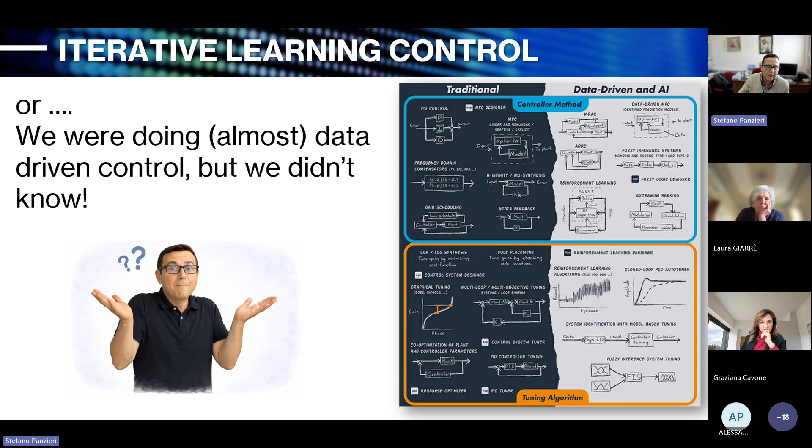Maybe one thing I have to say is that maybe we were doing almost data-driven control, but we didn't know it, because with iterative learning control, you work with data. You build your control starting from acquisition from the field, from the system. But if you ask me, is iterative learning control really a data-driven scheme, I have to say sometimes yes, sometimes no, because in many cases, as is written here, the model is required. While we know that in data-driven schemes, you try to avoid building your model, and you just want to build your control starting from raw data coming from the system.

But we have to see something later. Okay, for people that absolutely don't know what iterative learning control is, you have to imagine that you get a system. Maybe you also already have a controller that more or less is working, and you imagine that you can repeat your experiment, your trajectory, several times, and that each time you repeat it, you add a contribution to your controller that is calculated starting from data collected from previous iterations. So the two principles are that the system is reinitialized at each iteration and that the control is updated. So you need a memory, of course.

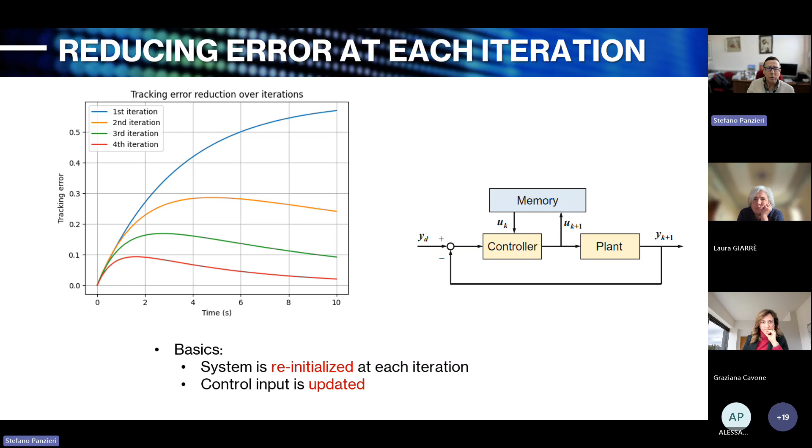This is a very easy scheme, but the problem is when such an approach can converge, and which is the right law to update your memory and to update your controller.

Well, I think we must go back now to the very beginning. And the very beginning is 1984, 40 years ago. In 1984, there was a Japanese professor, Professor Suguru Arimoto, who started showing us, in a small article, 'Bettering Operation of Robots by Learning,' that very simple law.

The one you see now, in which the next input, or the next additive term, is calculated by simply considering the previous iteration and adding a term that depends only on the derivative of the error at the previous iteration. It is sufficient to get zero error after a certain time. This is called a D-type algorithm, the derivative type algorithm.

It is not strange that we consider the derivative of the error in this feedback, because you have to remember that in iterative learning control, you reinitialize the system always in the same position. So the error at t equal to 0 is always 0. And of course, intuitively, if the derivative of the error is always 0, the error will be 0. This is very intuitive, but you have to demonstrate that everything is working.

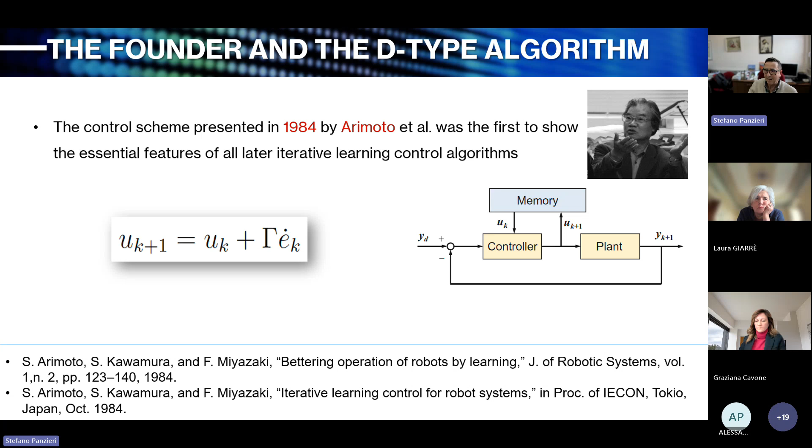But why must the relative degree be 1? Because don't forget that you are updating the input at time t with the error at time t. So you suppose that in some way the input at time t has an effect on the output at time t. So you must have a relative degree equal to 1, otherwise you cannot do it.

Then the demonstration is very easy, because you just have to calculate the output with the well-known relation: this is the free evolution and this is the forced response. Then you have to calculate the evolution of the error. So E dot, the derivative of the error at iteration k plus 1, is given by the difference between the derivative of the desired output minus the derivative of the output at iteration k plus 1. Then you simply write all the equations that give y dot at k plus 1.

You have a lot of calculation here to do, but they are only derivatives. And at the very end, you have an expression like that. Now, you can try to make the norm, to take the norm of this expression.

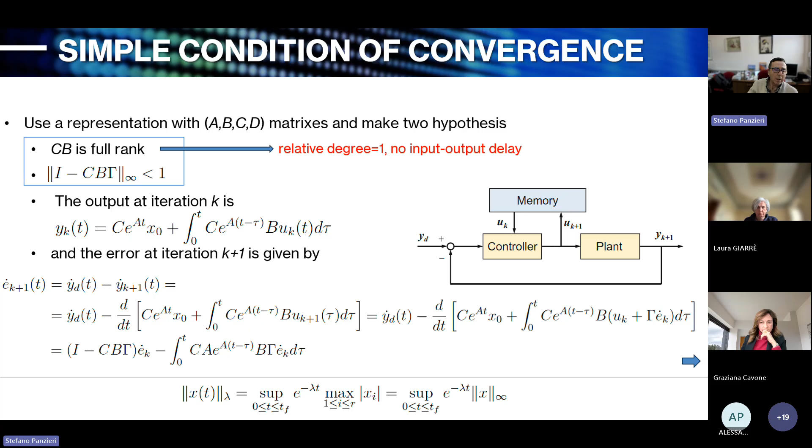You can use a lambda norm and also an infinity norm. And it is almost easy to understand that considering a sufficiently large lambda, it is possible to bound all the terms in the previous expression. You have to work a little bit, but not too much.

And so you can reach an equation in which there is on the left the lambda norm of E dot k plus 1, and on the right the lambda norm of E dot k multiplied by a parameter rho that can be made less than 1. So this is a contraction map, of course, and this implies the convergence of E dot. If E dot converges, of course, also the output will converge.

Now, this is really the very first algorithm that was presented, but it is an important one because all the subsequent algorithms that we will find are more or less based on such demonstration. Which is the main problem of this approach?

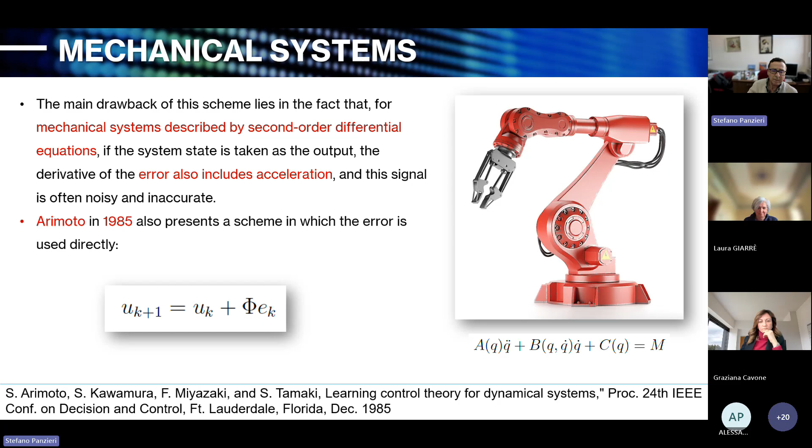Well, unfortunately, the convergence using the error and not the derivative of the error is not easy. But they demonstrated that if the system is strictly positive, linear, time invariant, that is, the passivity conditions holds, and this may be true, of course, in many cases, but not always. If you have this passivity condition satisfied, okay, you may have a convergence to zero.

Now, this is of course good. And later, Arimoto, with the other people that we saw before, proposed also more general laws. This is something that can be considered a PID controller in the iterative scheme, in which you have a feedback from the error, from the derivative of the error, and also from the integral of the error. Of course, according to the terms that you put inside your update, you have different conditions that you have to satisfy to have convergence.

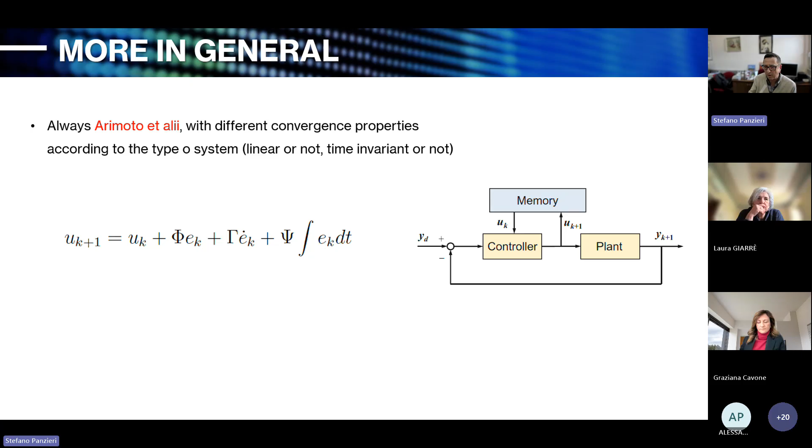After that, we can find other approaches, of course. For example, Togai and Yamano, always in 1985, 84 and 85 were very prolific years for this control scheme. They proposed something starting from the hypothesis that the system is expressed as a discrete system, so that can be also time variant. You see that the matrices A, B are dependent on the iteration, sorry, on the sampling time.

As an update, they have to consider something a little bit different. They can use, of course, the error. The input U is updated with the error that you have just obtained, and then another term that is built considering a little bit of lead.

Look here, the term V at iteration i plus 1 is equal to the term V at iteration I plus the error at iteration I, and of course this is okay, but at time or at step k plus 1. So we are a little bit looking into the future. Yes, but we are looking into the future of the previous iteration. So you can do that.

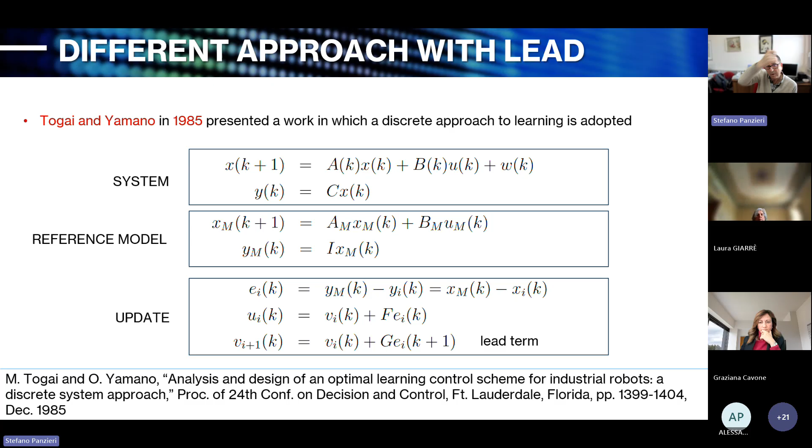Thanks to this approach, they could demonstrate easily that the evolution of the error, expressed as a discrete transfer function, can go to zero. This is a contraction map if the closed loop function has all the poles inside the unit circle, which is possible by choosing the matrix F appropriately, and then choosing also a matrix G in the right way, so that all the eigenvalues of this matrix are inside the unit circle, making this a contraction mapping.

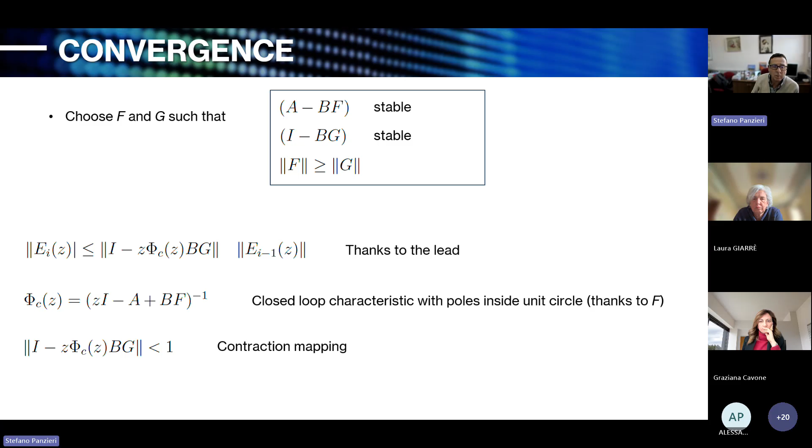But this may happen only because you are considering one step in advance the error. This is a technique that will be used also later.

Just to be complete, I have to tell you that sometimes you may try not to consider all the memory that you have from the previous iteration, but just a part of it, using a multiplicative term called the forgetting factor — forgetting factor because you forget a part of the previous input.

Is it working? Well, yes and no. Yes, because the convergence is easier. Yes, because maybe you have the opportunity to forget disturbances that are not periodic, I mean non-persistent, so disturbances that you could not reject with an iterative scheme. But the convergence is slower, and then you cannot guarantee an exact tracking, because you never reach exactly the input you need for a desired trajectory. But, of course, you may go very, very near.

Then there are a lot of people that try to reason not in time or with samples, but directly with frequency, using transfer functions. For example, in this paper — well, I think this is the right paper, but I'm sorry, I cannot be sure, because I found many references to this paper. I know more or less what is written inside, but I have lost the original paper. So I must put a question mark in this citation. I'm not really sure, but it should be that.

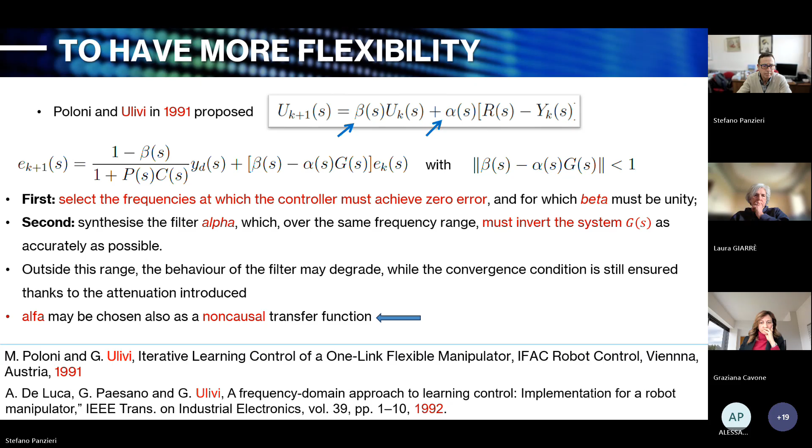It is possible, of course. Why is it possible? Because although you have a transfer function that is not causal, you have to implement it in time — but you can implement it using the samples of the previous iteration that you have, because you have all the samples of the previous iteration. So you are allowed to use non-causal gains as well. In this way you do the two things: you choose the frequencies in which you want the error near zero or zero, and you may have a non-causal inversion. This is a very, very nice result, of course.

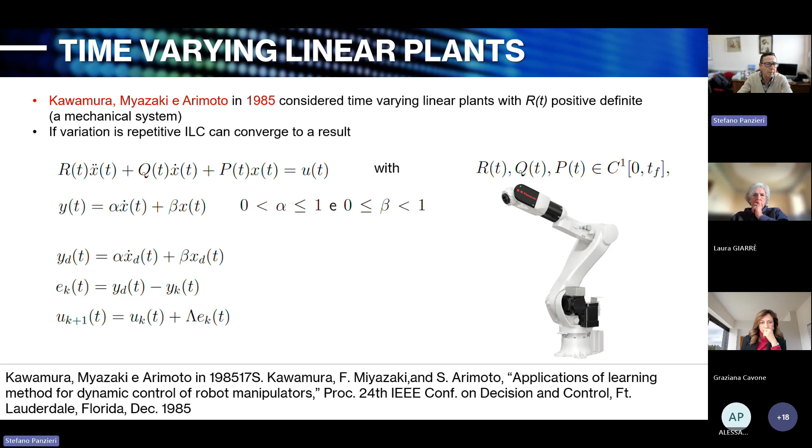Now we start with things that are a little bit more complicated, but not so much. In 1985, Kawamura, Miyazaki, and Arimoto demonstrated that even if you have a plant that is time varying, what's important is that it repeats in the same way all the time, so at each iteration it varies always in the same way. If you have such a plant, you may set up a learning algorithm, in this case using the error directly, not the derivative, and you may very easily have convergence of this algorithm.

Another approach presented by Moore with time-varying plants is quite different, because in this case you have an update that depends on the output of the system, but you directly multiply the output by the inverse of the plant. The inverse of the plant is obtained with an optimization problem, so you calculate the minimum at each iteration of this expression with respect to n. When you have the minimum, n exactly inverts the plant, and then you may apply it to update the input. This is a real data-driven scheme in which you don't have a model, you estimate everything at every iteration.

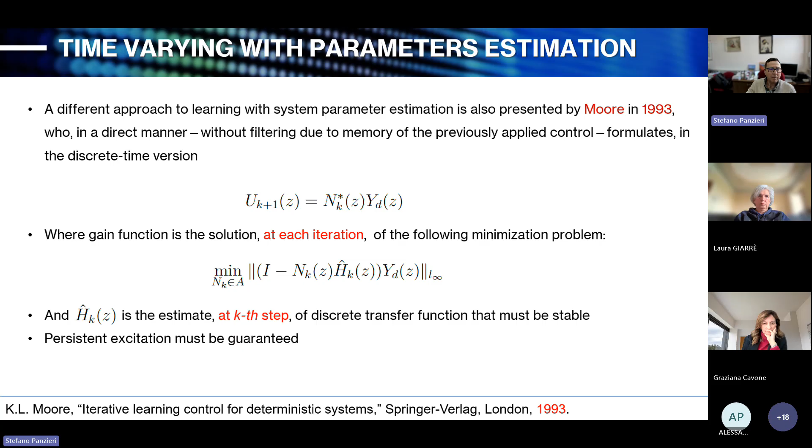Of course, there are other kinds of formulations. For example, you can put in one vector all the samples of the input, and in another all the samples of the output, and then write the system with an expression containing a matrix G that just maps the inputs to the outputs. This is a very compact representation in the sense that you write it easily, but your matrix G is very large, because it contains all the numbers of your system inside. I think that in the '90s this was considered not easy to use, but actually this is exactly what we do in data-driven control now, so this is no longer a problem.

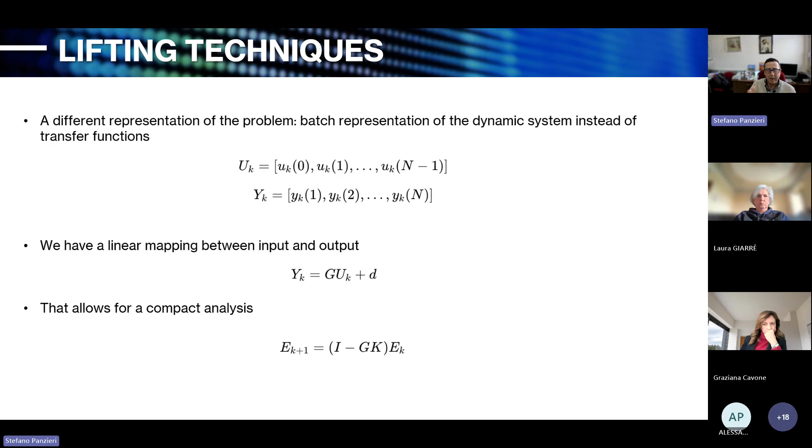There are many papers based on this representation that present results saying more or less the same things we have seen.

What about nonlinear systems? When we go to nonlinear systems, there are several techniques that have been presented over the years, using for example Lipschitz analysis, or partial feedback linearization, or decomposing your system into several different controllers using backstepping techniques, or sliding mode to constrain your system to a particular manifold or trajectory, or singular perturbation analysis trying to linearize your system as much as possible, or any other kind of stabilizing controller, just to transform your nonlinear system into something with better properties that can fulfill the conditions found and published in several papers.

But also looking at the paper of Arimoto in 1984, we find an approach to nonlinear systems. The nonlinearity is limited to the function f: we suppose the input is linearly related to the derivative of the state, and the output is linearly dependent on the state, so the nonlinearity is limited to just this part of the system. Simply supposing that f is Lipschitzian, with hypotheses of continuous differentiability on the input and output, and considering a condition similar to the one we saw before, they were able to demonstrate again the convergence of the derivative of the error to zero. This demonstration is quite simple.

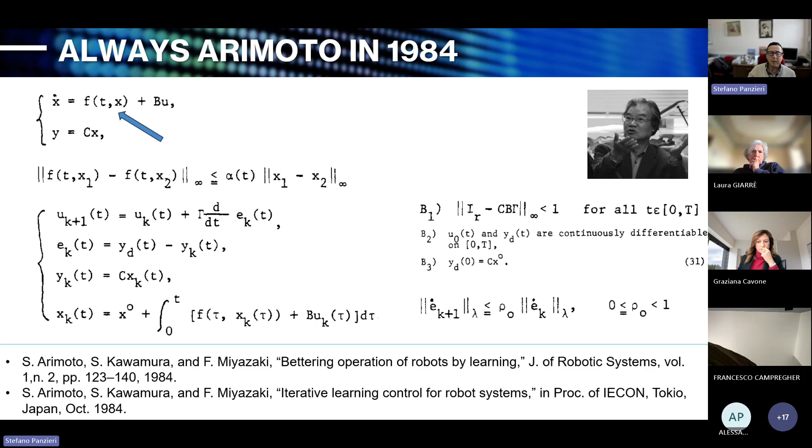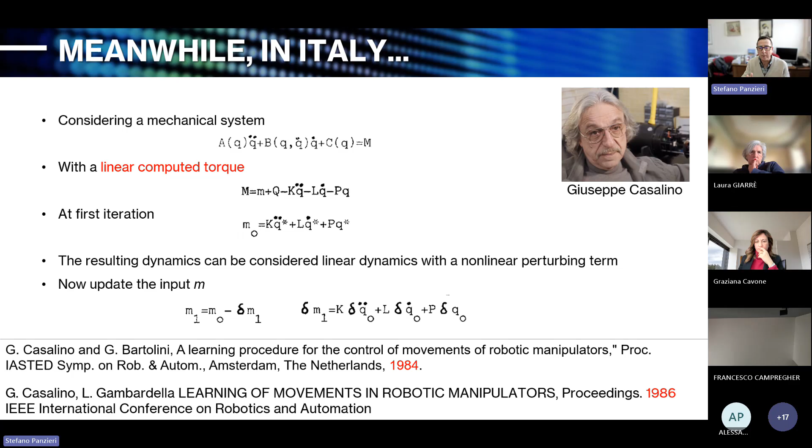At this point we have to remember the work done in Italy by Giuseppe Casalino, who in 1984, the same year as Arimoto, proposed a scheme related to a robotic application involving a linear computed torque. That means you imagine having an input made mainly of a computed torque, something related to the trajectory you want to implement, but there is also a part of the control that you can modify at each iteration. So in the end, what you're doing is just updating your computed torque, adding a term that compensates for the difference between what you estimated from the beginning and what you really had to give to your robot. The condition for convergence of this scheme is not difficult to satisfy for a robot, and so it was a successful scheme that has been applied many times.

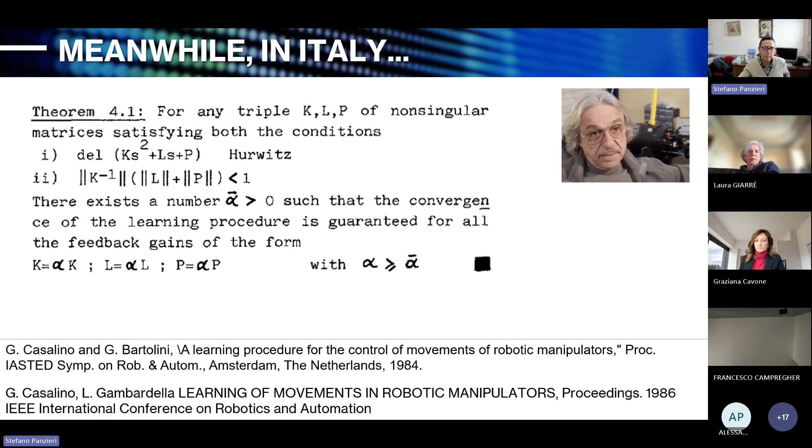Of course, I'm speaking of a work of 1984, and so in the last 40 years many other things have been done, many other approaches that are working on feedback linearization. Backstepping is also another possibility.

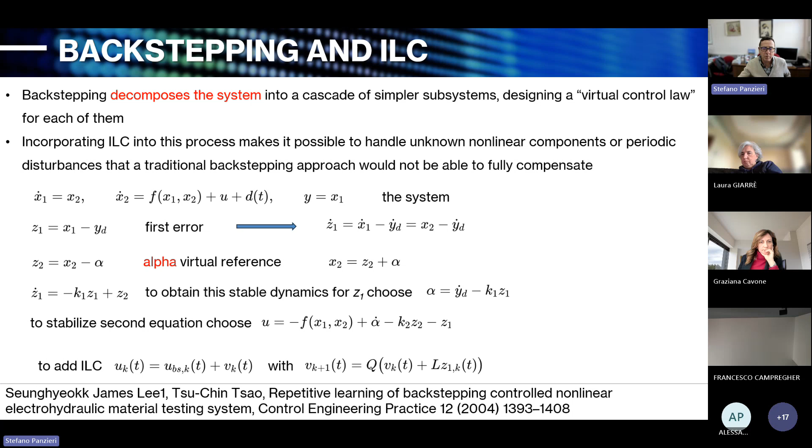You can use, for example, a nonlinear system for which you have an output related only to one state variable. You close one loop using a virtual reference, then you close another loop, and then you may define a learning scheme that can be used to stabilize the external loop, propagating the effects inside towards all the other controllers that are part of your decomposition. More easy to do than to explain.

I found also this very interesting paper, really recent, from 2023, due to Pierallini, Angelini, Mengacci, Palleschi, Bicchi, and Garabini, in which they consider this very interesting application: an underactuated system with elastic joints. So a real difficult plant.

The model is here, it's a nonlinear model, of course, and then elasticity adds many difficulties. They also consider having non-repetitive disturbances, and the problem of non-repetitive bounded deviation of the initial position. So they imagine that the initial position is not exactly always the same, but maybe near the same position. They consider a law in which they update the input with a time and iteration dependent gain.

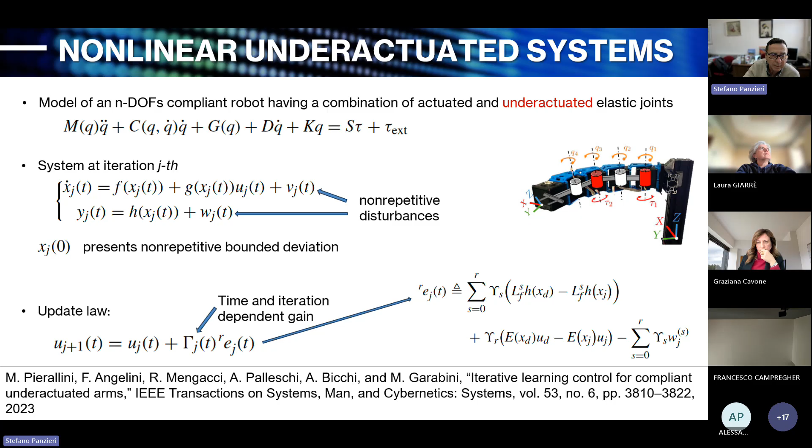So they try to do something really not easy, but in spite of such difficulties, they are able to calculate the evolution of the error iteration by iteration. The expression is here. They have to consider the Lie derivatives of the function h of the output, and work also with conditions related to Lipschitzian constants. They are able to demonstrate that the error remains bounded.

I think that it's enough. It's the most you can do, because you are supposing non-repetitive disturbances. So more than this is really impossible.

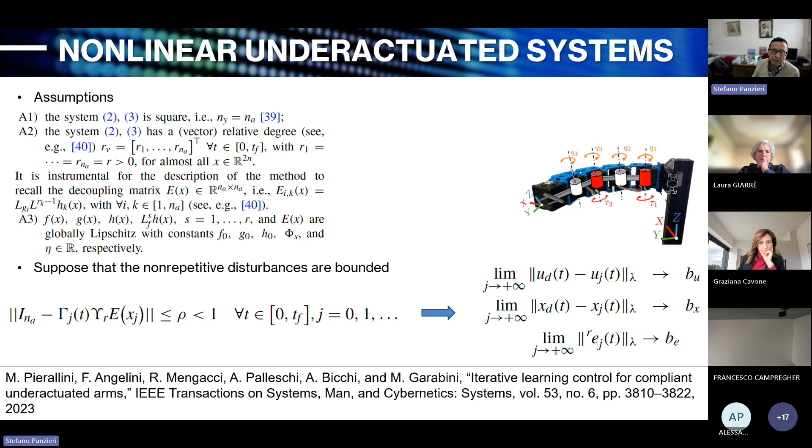Another interesting paper that I found, I couldn't write the year but it's recent, is the control of cranes. Cranes are difficult to control because you have a mass that is suspended behind another one that can move, a trolley that can move along a bridge, and typically these are non-minimum phase systems, and in this case the authors propose to use sliding mode.

So they firstly define a sliding surface, or more than two sliding surfaces, and they close the loop with this sliding mode. After closing the loop, the system is reduced to a behavior that is really simpler than the one you have without the sliding mode, because without it you have a lot of nonlinear equations, very difficult to use.

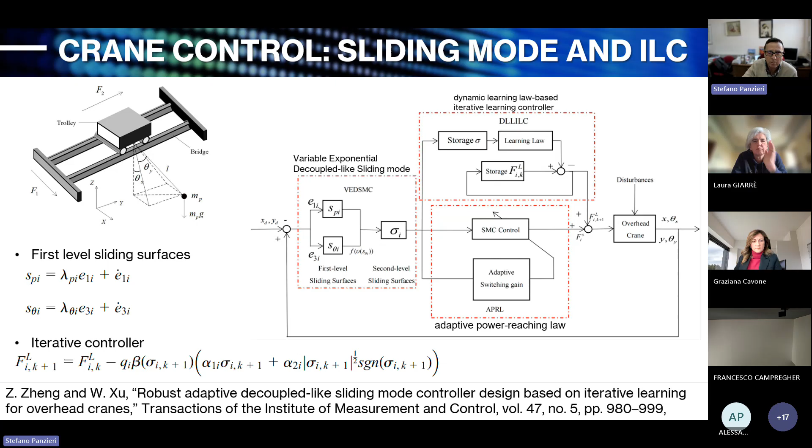Then you try to update a contribution that iteration after iteration is related to the output of the system, and they succeeded. In this paper, they clearly show how this approach can be feasible, and if I remember, there are also some experiments just to show that it is really feasible. Which are other problems related to iterative learning control?

At this point, there are a lot of problems, also new problems. One is the problem that I cited before, for example, for non-minimum phase systems, for which you have robots with elastic elements. Non-minimum phase systems have the problem that when you invert the plant, the inversion is not stable. This means that if you want to control them with a standard feedback controller, the only thing you obtain is instability.

We have already seen that this kind of problem in iterative learning control can be overcome using non-causal inversion, that means, for example, using a transfer function filter that is not causal, or in schemes where you don't have a transfer function but you have the samples, considering advanced output data, or even it is possible to consider a shift of the reference. So advancing the reference is more or less the same as shifting the output data.

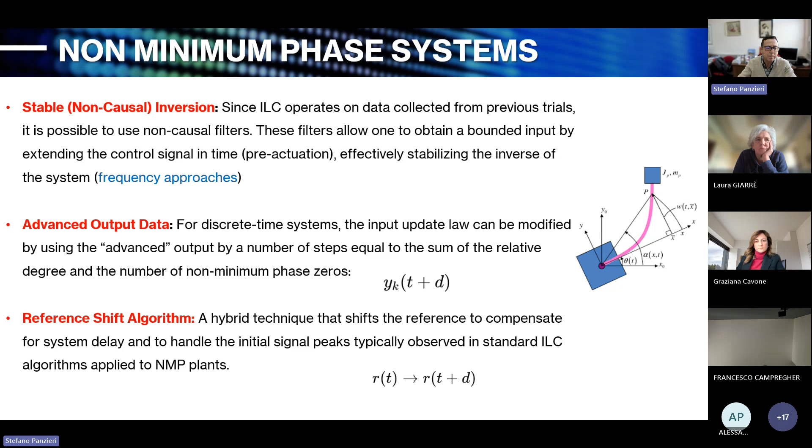This is a possible solution, but some problems remain in any case, because the convergence sometimes is really problematic. Another problem that is incredibly difficult to solve is the problem that you have when your trial is not ending.

For example, you are trying to learn something a little bit difficult, and your system cannot complete the trial because it is collapsing before. For example, you would like to learn how to play with a ball, and at the very beginning the ball falls down, so you are not able to complete a trial. So what can you learn?

There is this paper of Dong Shen and Xuefang Li called Iterative Learning Control for Systems with Iteration Varying Trial Lengths, 2019, in which they analyze the problems you may have with trials that are not ending. They propose to consider a modified tracking error, simply set to 0 for the samples that you don't have. Then, using an iteration average operator, they propose a modified iterative learning control scheme, and they demonstrate that this algorithm can achieve convergence even if the trials at the beginning are not completed.

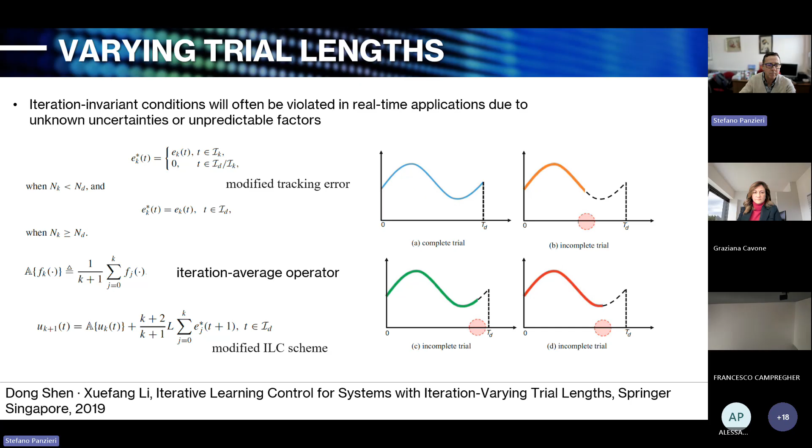So there are a lot of people working on this topic, and I think there are a lot of possible applications. Another big problem is the initial state shift. I mean, the state at the very beginning is not always the same, because you are not able to put the system exactly in the same state at the beginning of your trial.

This means you have a kind of persistent term that, if it is always the same, you can try to compensate iteratively. But if it is changing iteration by iteration, you will never be able to compensate it. What you can do, for example, is try not to consider the error at the very beginning, multiplying it by a function that is initially almost 0 and later becomes equal to 1. So you try not to consider the errors at the beginning, hoping that the transitory connected to the initial condition will vanish, so it is not so important.

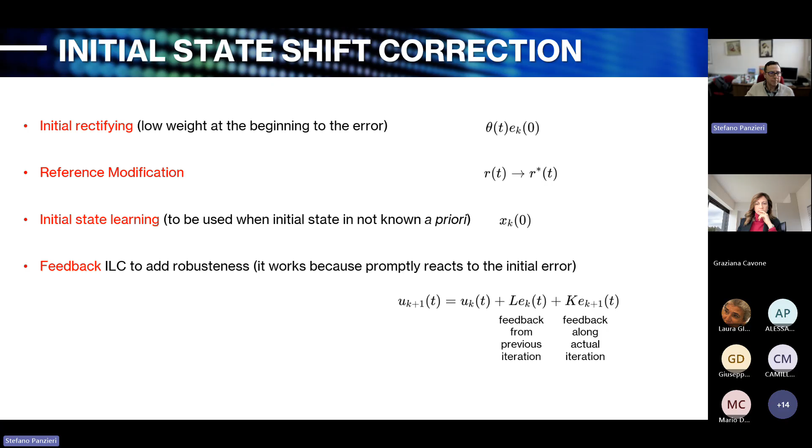Another big problem is related to data that are not always available. For many reasons — for example, you are using an incremental encoder that gives data only at some sample times, which are not enough for the application you would like to implement. The sampling time of the encoder could be slower than the sampling time of your algorithm or any other kind of sensor, so you don't have all the samples you need. Or you are on a network and you lose some packets, or packets are coming with a delay.

In any case, this is a problem called intermittent data, and it is possible to work with intermittent data in some conditions. There is an interesting paper from 2022 by Nard Strijbosch and Tom Oomen, published in Automatica: Iterative Learning Control for Intermittently Sampled Data, Monotonic Convergence Design and Applications. It's an interesting paper you must read if you want to know more about this.

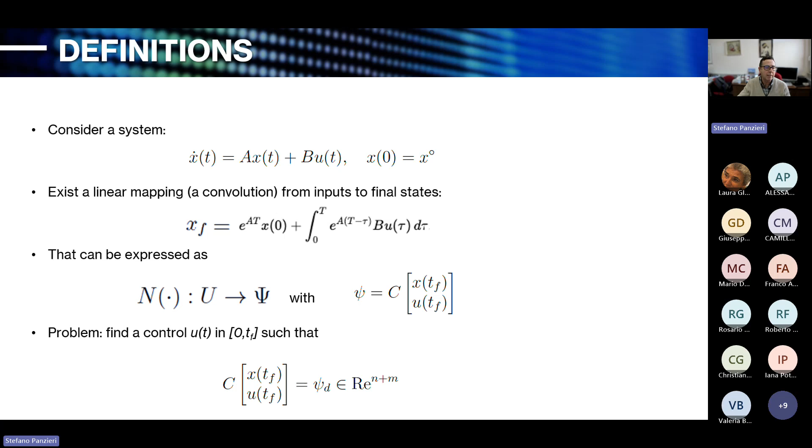It's not difficult to set up such algorithms. Imagine you have a linear system. With a linear system you have a linear mapping between the control input and the final value of your state. It is a linear mapping, and of course a convolution, so it's not easy to manage, but it's still linear. This mapping can be used to represent the final state as a function of your input.

So this is the initial state, this is the contribution of the input, and this is the final state. If you set a control law where you update your input by multiplying the error between the desired final state and the actual final state by an operator F, with a simple substitution you obtain an iteration for the error described by this equation. If F is able to exactly invert the operator N, you obtain zero from this equation, and you have convergence in just one step.

Otherwise, it's possible that you don't have exact inversion, so considering the norm of such operators, if the norm of this expression is less than 1, you may still have convergence of the error to 0.

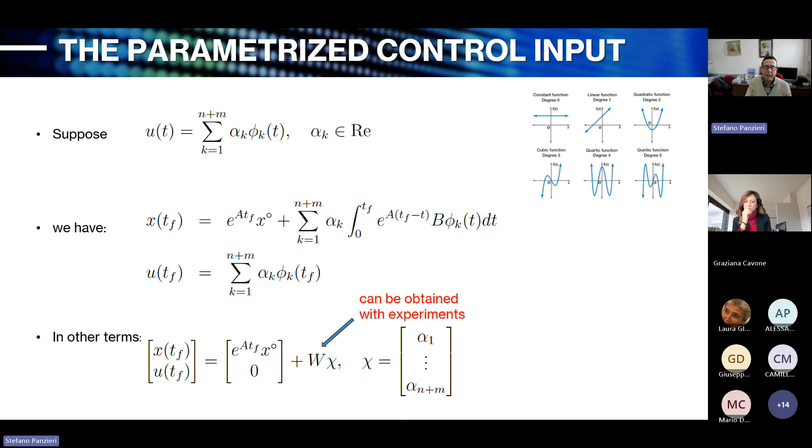This means you may define your input as a linear combination of basis functions. Basis functions can be, for example, polynomials, but you're not limited to polynomials. So you have a linear combination of basis functions with parameter alpha. When you write the relation between the parameters alpha and the final state, you obtain only a matrix - the operator is a mapping represented only by a matrix. You multiply this mapping by the parameters and obtain the final state. At this point, you can easily use this mapping to update the vector of parameters.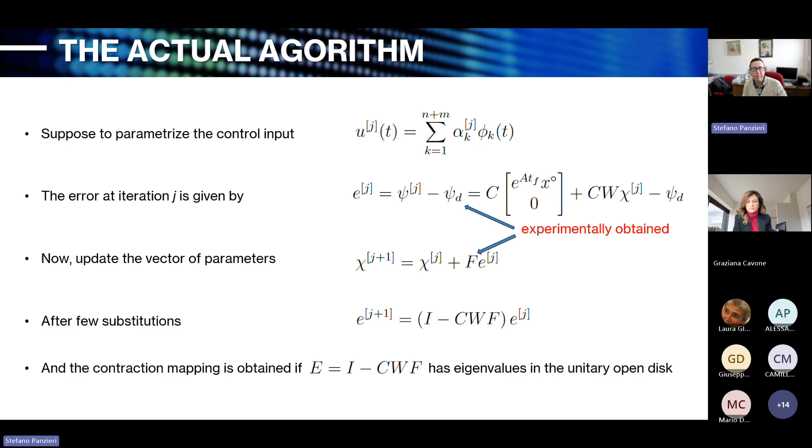And the relation that you have at the very end should be this one... yes, it's this one, and it's very easy to demonstrate the convergence of this algorithm. The good news is that any kind of problem related to non-minimum phase systems has no importance for this algorithm, because you're not considering the transfer functions or the output along the whole time, but just the final state. So this works perfectly also with non-minimum phase systems.

This is, for example, an application we did in '97 - Lucibello, Panzieri, Ulivi, 1997 - with flexible robot arms. You go from this position to this other position. This is the value of the first angle, this is the value of the second angle, and this is the deflection, I think.

No, these are the speeds. The deflection is here, of course. There is a small deflection at the beginning, then the robot is deflected in the other sense, then it stops. So it's very easy to implement if you don't care what happens between the initial state and the final state - you don't control it. But really, you cannot control it this way.

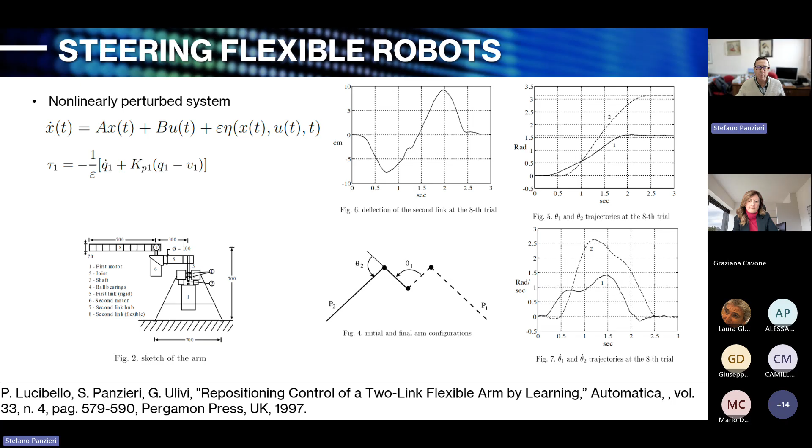No, you can control it, because if you want, you can put several intermediate steps and specify that you want particular outputs at those steps. Of course, you have to increase the dimension, the number of your parameters, but you always have a controller with low dimension. That is very good.

The same reasoning can be applied also, for example, to non-holonomic robots. This is a paper in which we apply this algorithm to a car-like robot.

It is possible for car-like systems to transform the model into a chained form. The chained form has the property that the first input is related to the first variable: Z1 dot equals V1. The second input is related to the second variable in this way, and the equations of the other variables depend only on the first input.

If the first input is, for example, piecewise constant, the second part of your system is a linear system as far as the input V1 is constant. So if you use a basis function made as a constant for V1, you have a sequence of linear systems. It is time varying, but constant for many intervals, and so you can set up this learning algorithm very easily.

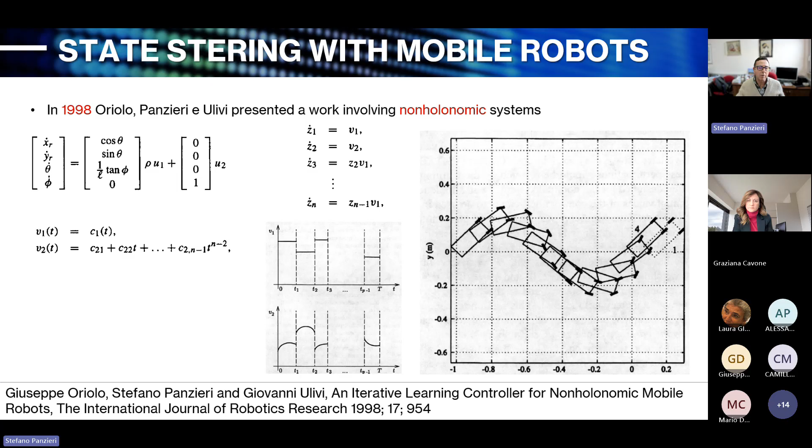I've got three more slides, so I promise I'll finish very soon.

One is this: iterative feedback tuning. This is a very interesting iterative learning scheme in which you consider that your system is controlled by two transfer functions depending on a parameter rho, and you update this parameter at each iteration, optimizing an objective function that is the expected value of the error. So you make an optimization every iteration, and after minimizing this objective function, you have the possibility to update the value of your parameters using a quasi-Newton method. The problem is to compute a gradient, but the gradient is not easy to compute.

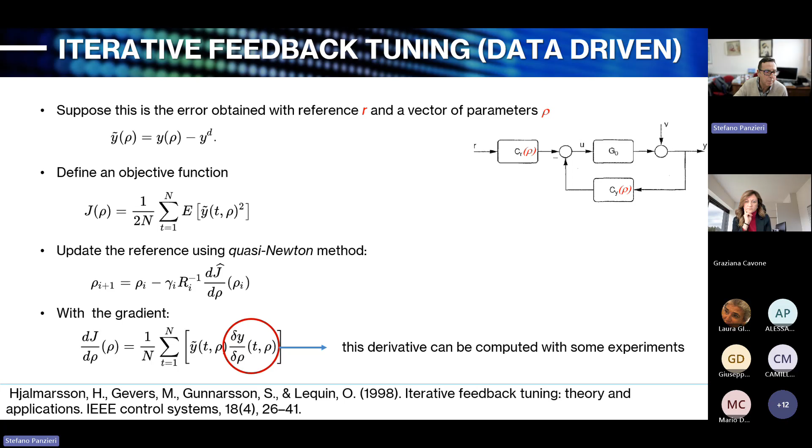Calculating this gradient is possible only by doing some experiments. So this is an iterative scheme that uses experiments to evaluate the gradient, which is then used to update the parameters of your controllers. It seems quite difficult, but it is possible to apply. There is a very nice paper in IEEE Control Systems that shows how to do that.

Another extension I want to show you is cyclic control, in which you have state steering done cyclically. This is not a cyclic trajectory - we are just asking the system to have particular values for the state at some points, and between one point and the next, you may have any kind of trajectory. But it's interesting that the update along these cyclic trajectories takes place without stopping the system. So while the system is cycling, you may update using all the samples you are collecting while it's going around. This is also very nice.

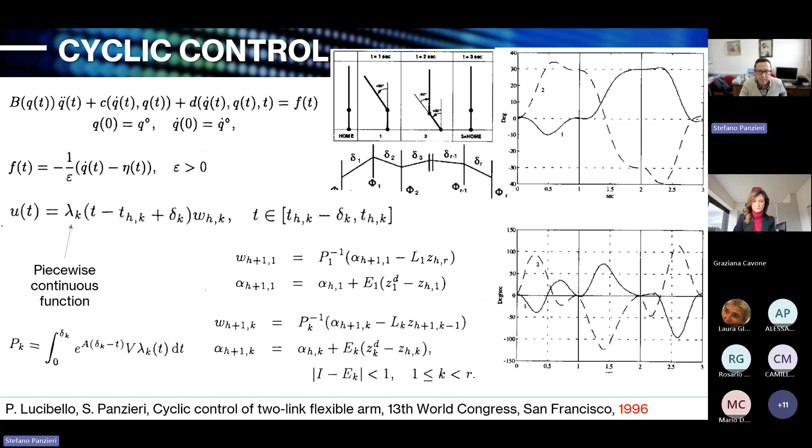Maybe it's possible to say that something very similar to iterative learning control is repetitive control. In repetitive control, you have a periodic generator done in this way - in synthesis, this is just a delay of n samples, so this loop can memorize a sequence of n samples. You put it here, and this element continues to learn and contribute to the control - it's a memory that continues to contribute to the control until the error goes to 0. This is an important scheme that has been used in many cases.

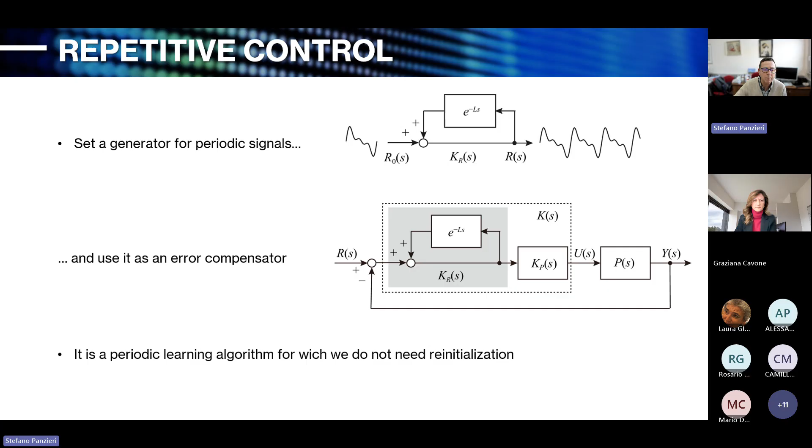In particular, in this paper, we use this repetitive controller to make the rotational velocity of a wind turbine as stable as possible, trying to compensate for variations mainly due to the fact that in a large wind turbine, the wind is not the same when you go down or up. There is an effect called wind shear, which is also terrible for airplanes that are landing. The velocity of the wind is less near the ground, and this difference in wind velocity induces vibrations and variations in the rotational speed.

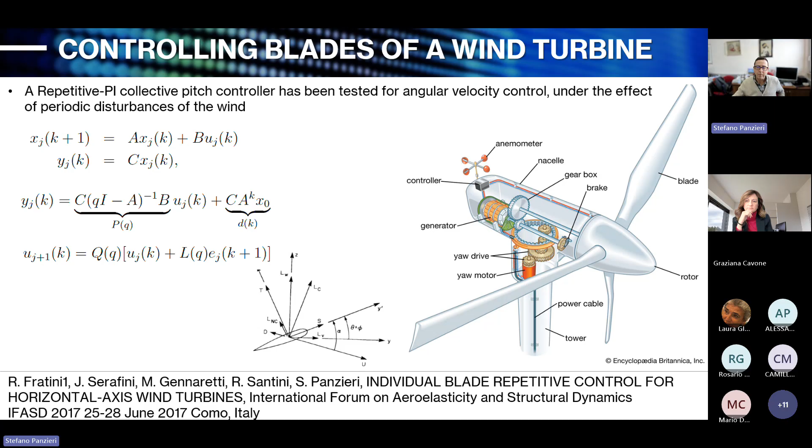But you have a control action that acts on the inclination, the rotation of the blades, so you can change the incident angle of each single blade. You may try to compensate in this way the effect of wind. Of course, the controller is repetitive because it continues to rotate as far as the wind is coming.

Last slide. I found this paper of 2024, very nice, but maybe we are at the very beginning of something new, in which an explainable AI - I don't know if you know what an explainable AI is - substantially is an AI to which you ask to explain what it is doing. You connect this AI to almost everything, and then you ask this AI to put in relation all the things that it sees with a new value for the contribution that is given to the iterative learning control.

So during each iteration, the system applies the current control input, measures the resulting output, and computes the error between the desired and actual outputs. The control input is then updated based on this error using a predefined learning rate, and until now it's always the same. But you can use this Shapley additive explanation, which is a typical scheme of explainable AI.

You can use this SHAP to provide insights into the influence of different factors on the control decision. SHAP is made just to judge how different terms of an expression may influence a particular output. So you can use it, for example, to understand a particular cost function made of different terms, and which term is more influent. In this case, SHAP is used to judge the influence of the error output, or the input, or any other term that is connected, and can be used to better understand the evolution of the iterative learning control.

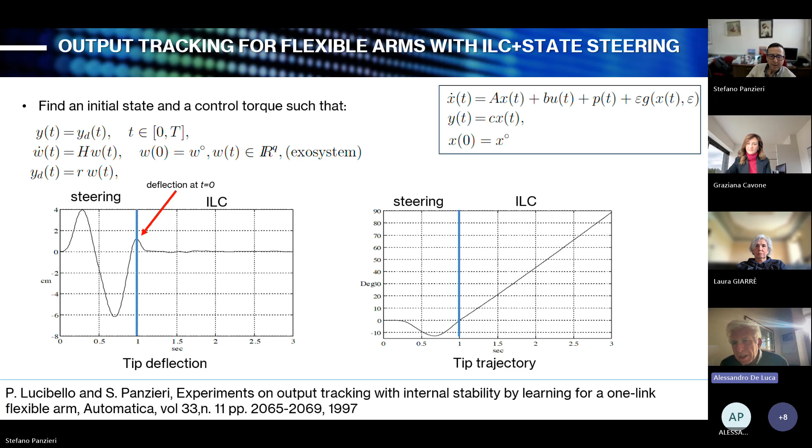Okay, good. And the second comment, more general, related to the last topic of machine learning integrated with these techniques. With some students, we made a comparison some time ago: what happens if you have a single trajectory to be learned and you apply this type of technique for standard, let's say, rigid robots, so no problem with non-minimum phase.

Or if you try to just apply reinforcement learning on multiple trajectories, and then you see what happens on that particular trajectory. My feeling was that if you have to do a very good tracking of a single trajectory, this method still beats the machine learning technique. Whereas as soon as you want to generalize, with this method you have to restart from scratch, while what you learned with machine learning is reasonably good also for new trajectories. So what is your experience on that?

The problem with machine learning is that you don't know why, but it is functioning. That is, you can accept to start from scratch anytime, because you are not doing that yourself — it's doing it on my computer on my desk while I'm going to the bar.

The generalization — you mean how good could be the generalization of a neural network when you pass from one trajectory to another? Because the problem with every learning control is that you learn how to realize one single trajectory, every time only one, and you have a memory that is good only for that trajectory.